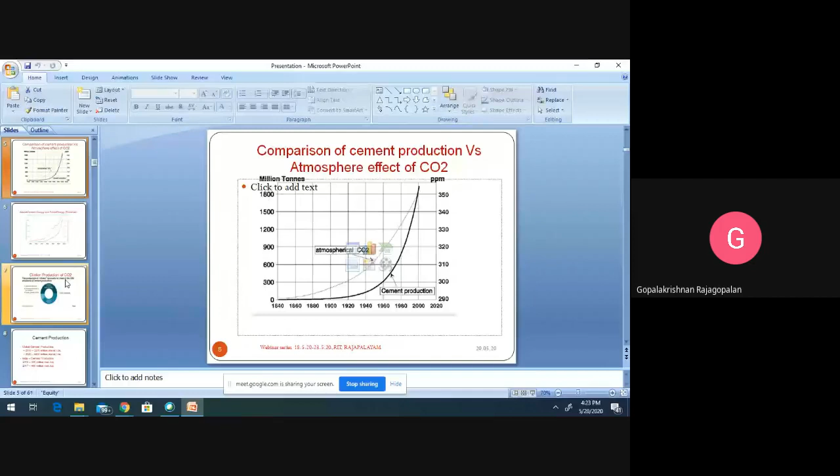So the global cement production, we have come across a summary of 2010.

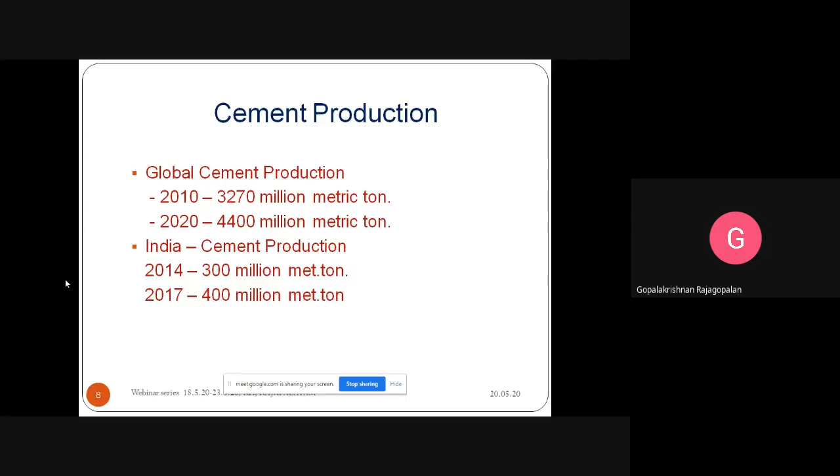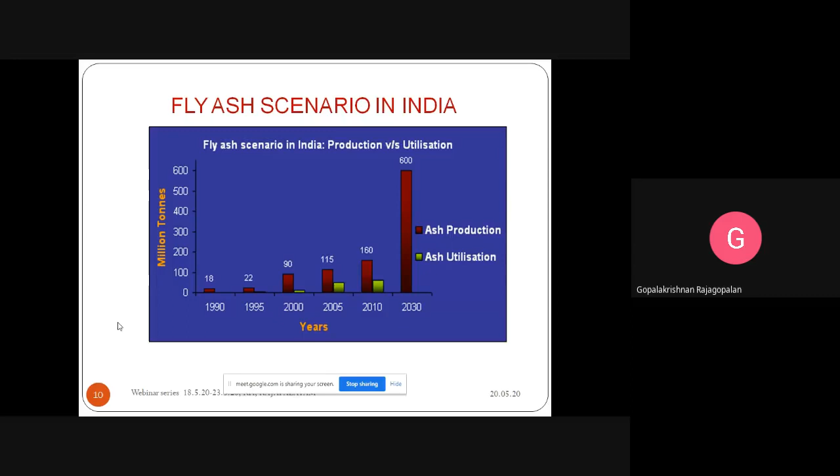So the fly ash scenario, we have already seen. Then coming to the utilization of fly ash, we have already seen.

Geopolymers were discussed in the 1950s, as we already discussed. It's the combination of an alkali activator and an aluminosilicate material. The alkali activator is sodium hydroxide and sodium silicate. The aluminosilicate material includes fly ash, GGBS, metakaolin, and other materials having zeolite structure containing alumina and silica. This is called the aluminosilicate material.

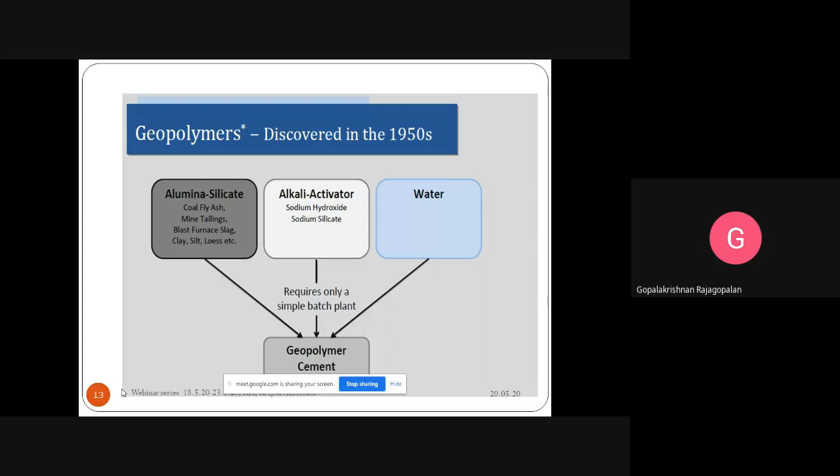The alkali activator will be sodium hydroxide, sodium silicate, or potassium hydroxide, or potassium silicate. Mostly sodium hydroxide and sodium silicate will be better compared with the other hydroxides. So finally we can form the geopolymer cement. This is the main chain, the polymeric chain.

Kaolinite, this is what we call the polycondensation of kaolinite, which is a silica-alumina material. This is the main chemistry behind the geopolymer.

For example, silica and alumina combine with sodium hydroxide to give Na-SiO-AlO. This we call silicon oxoaluminate, also called hydrosodalite or polysialate. We will understand more in the next slide, but this is the basic equation for the geopolymer combination.

So what happens in the chemistry behind cement? Calcium silicate hydrate is formed from the cement, and calcium hydroxide is liberated, as we will see. But in the case of geopolymer, water is released and there is no effect from the water.

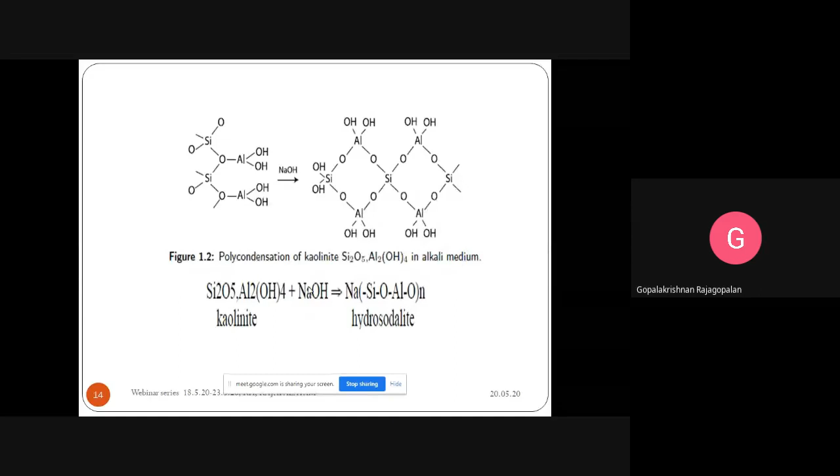So when cement needs early strength, we go for C3S, which is 45 to 60%. Early strength means we go for C3S. Later strength means we can go for C2S. This is the main reaction.

What happens is calcium silicate combined with water gives calcium silicate hydrate plus calcium hydroxide. This calcium silicate hydrate gives the main strength to the cement. This is the chemistry behind cement.

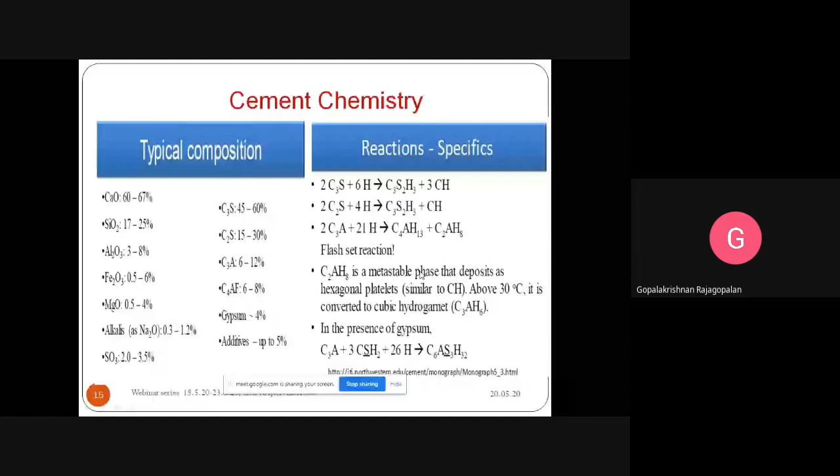Geopolymer concrete is made using aluminosilicate materials such as fly ash, GGBS, metakaolin, and an alkaline activator solution. The setting mechanism mainly depends upon polymerization. Curing temperatures are between 60 to 90 degrees Celsius, or ambient curing. Unlike conventional concrete, geopolymer concrete doesn't have water curing. It can be cured in the ambient, that is the open place, or it can be heat cured in chambers. We'll discuss that one by one later.

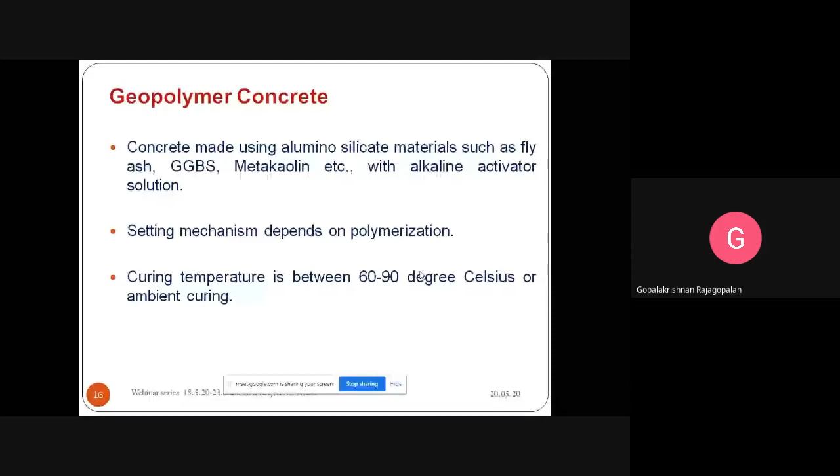The main constituents are aluminosilicate materials having GGBS and fly ash, an alkaline activator which is a combination of sodium hydroxide and/or potassium hydroxide and sodium silicate. GGBS and fly ash contain silica, alumina and calcium oxide.

Coming into the category of fly ash, we have different types available in India. IS 3812 fly ash states there are two categories, grade 1 and grade 2. According to US ASTM C618, we have class F fly ash and class C fly ash. Class F fly ash has less than 10% calcium oxide, while class C has more than 10%. We can use class F fly ash for producing geopolymer concrete; it gives more strength compared with class C fly ash, which has more calcium oxide. Similarly, metakaolin also contains silica, alumina and calcium oxide.

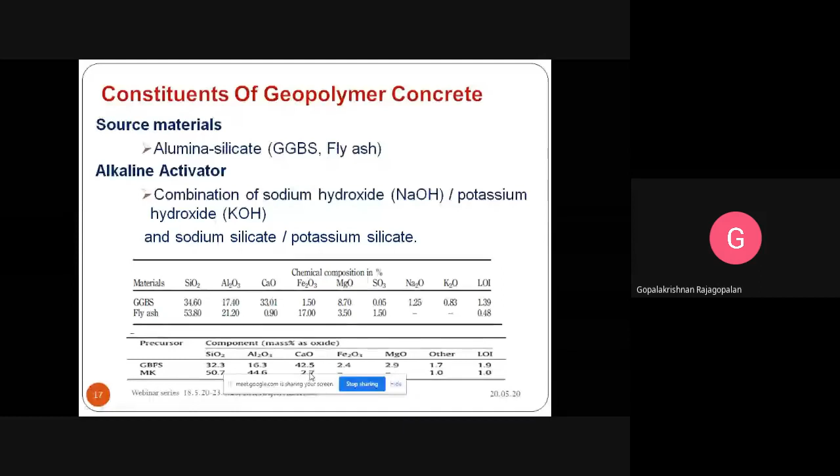So these are the main geopolymer structures. This is the amorphous, semi-crystalline, three-dimensional silica aluminate material. This is called geopolymer.

The first one, zeolite, I already explained. This is called silicon oxoaluminate having one chain. Then we call it poly(sialate-siloxo) having a double chain. We have another one, poly(sialate-disiloxo), having another chain. Depending upon usage, this structure will be used. Suppose we have a silica to alumina ratio of 1, the specific purpose is different. If the ratio is 2, the purpose is different. If it's 3, the purpose is again different.

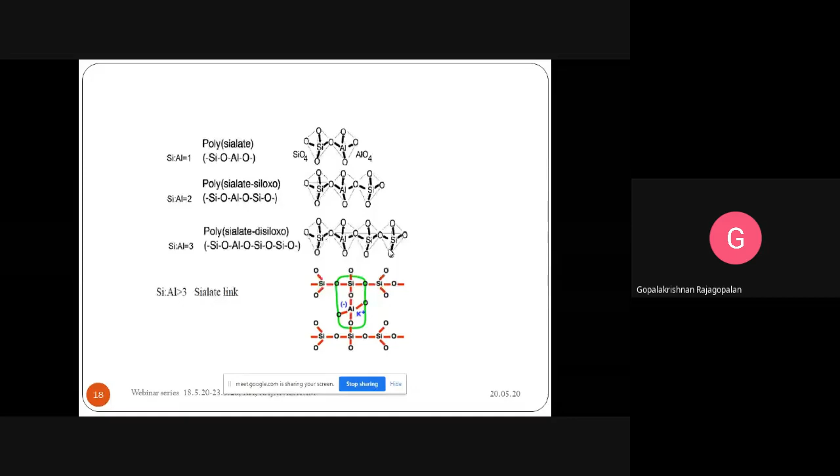What occasions can we use these? What are the things where we can use this particular structure? You'll see that on the slides below. This is the bondage or covalent bond having silica-alumina ratio 1, ratio 2, ratio 3, and ratio more than 3.

This is the model created for geopolymerization. First, aluminosilicate material is available. Due to dissolution with water, it forms aluminate and silicate. Then speciation happens, then gelation, then reorganization, and finally we have polymerization and hardening. This structure model was created in the year 2007 by Duxson.

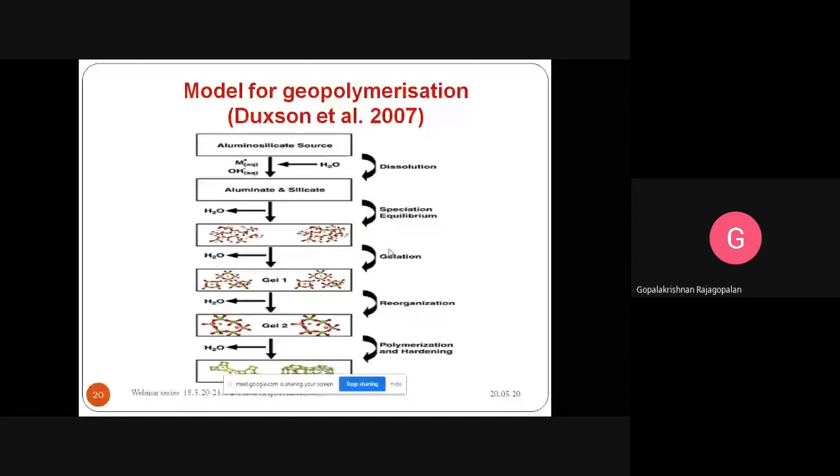This is the fly ash geopolymer concrete. Going into more detail: fly ash is produced from thermal power stations where coal is generated. Alkali solution plus this fly ash causes dissolution to happen, so a silica and alumina species structure is formed. Then nucleation happens with the ratio of aluminosilicate oligomers, then oligomerization happens, forming the poly(sialate) framework we discussed. Then final polymerization happens, giving the geopolymer phase, followed by curing. The final product is fly ash based geopolymer cement concrete.

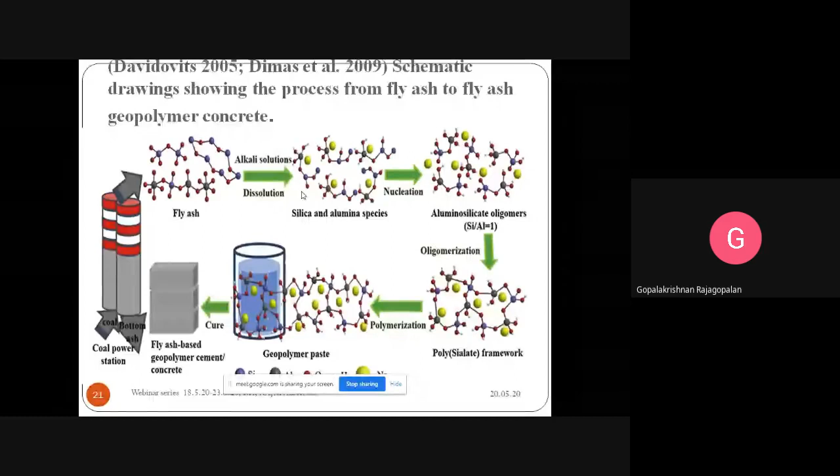So this is the chemistry and structure of the reaction happening in fly ash based geopolymer concrete - the molecular structure happening in the geopolymer structure.

Another researcher describes what happens if we use metakaolin instead. Metakaolin contains silicate and alumina, which gets polymerized, forming oligomers, then nucleus, then aluminosilicate material, the zeolite phase, then aluminosilicate, and finally we get the geopolymer. This mechanism was formed by the researcher Provis.

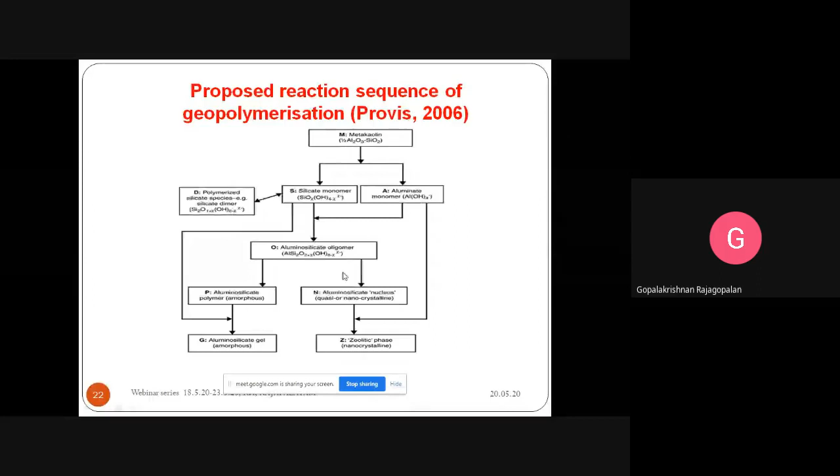Suppose we are using GGBS in geopolymer concrete - what is the structure in GGBS based geopolymer concrete? This is the glassy material dissolution mechanism of aluminosilicate glass during the early stage of reaction. GGBS contains glassy materials, so the exchange of H+ ions happens first. Second, there is breakdown and hydrolysis of the Al-O-Si bond, then breakdown of the depolymerized glass network, then finally release of silica and alumina.

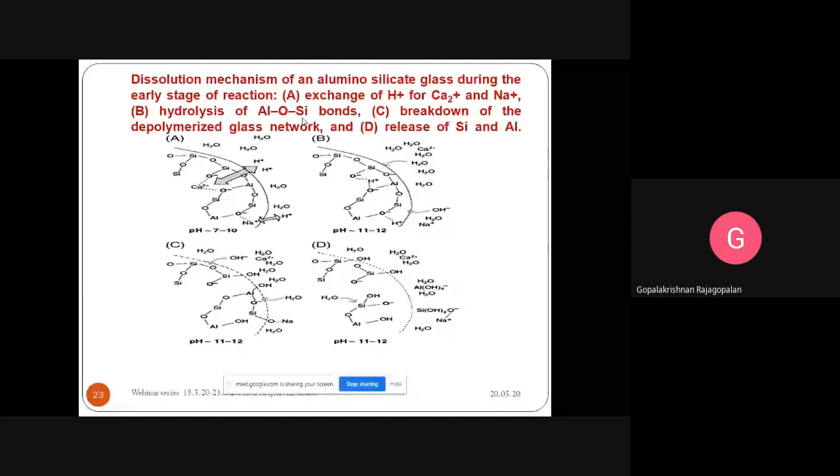So the main advantages of geopolymer concrete: reducing carbon dioxide emissions, low price, better compressive strength, fireproof, low permeability, environmentally friendly, and excellent performance in both acid and salt environments. It is very suitable for precast element concrete products like railway sleepers, electric power poles, and marine structures.

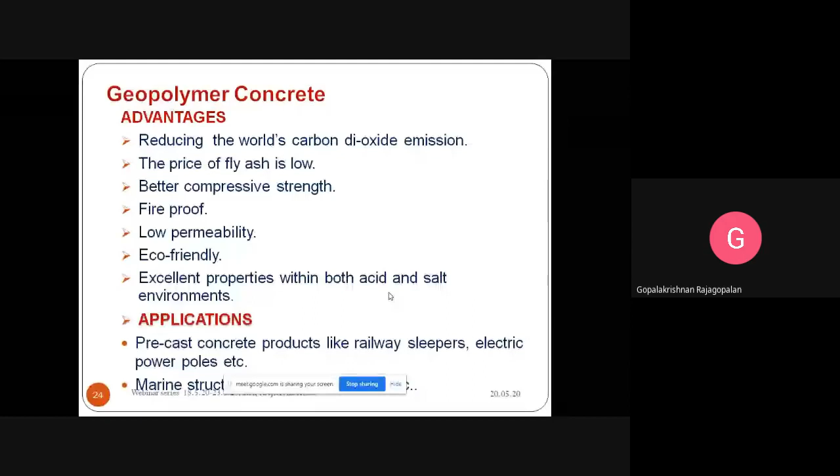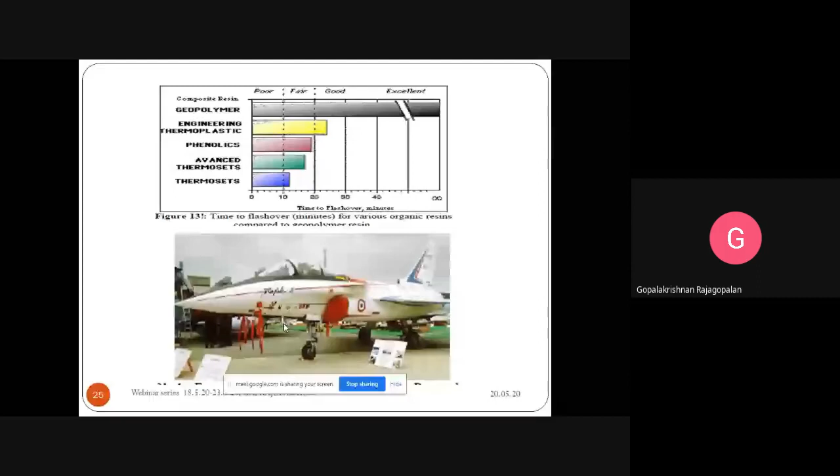This is the first aircraft produced in 1986 using geopolymer synthesis material. French Air Force created this. Then they produced a geopolymer cement, called polysialate siloxo cement, having good compressive strength.

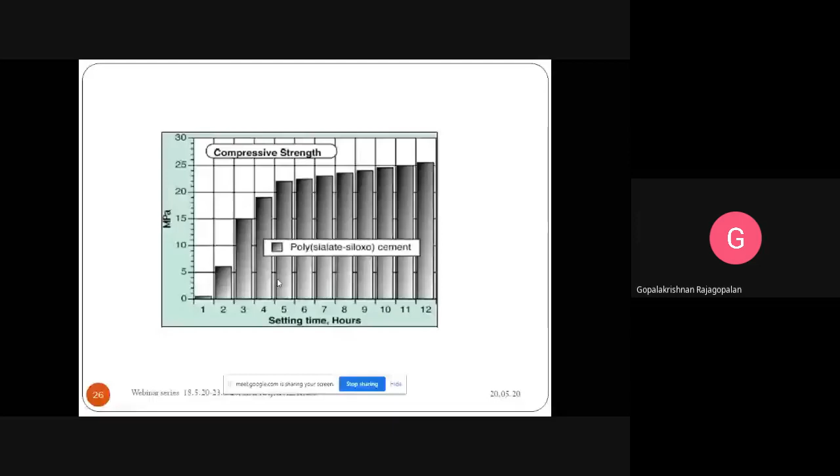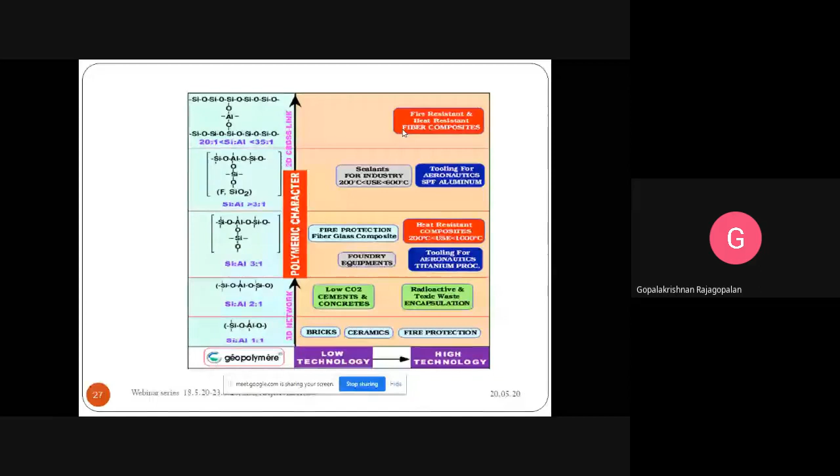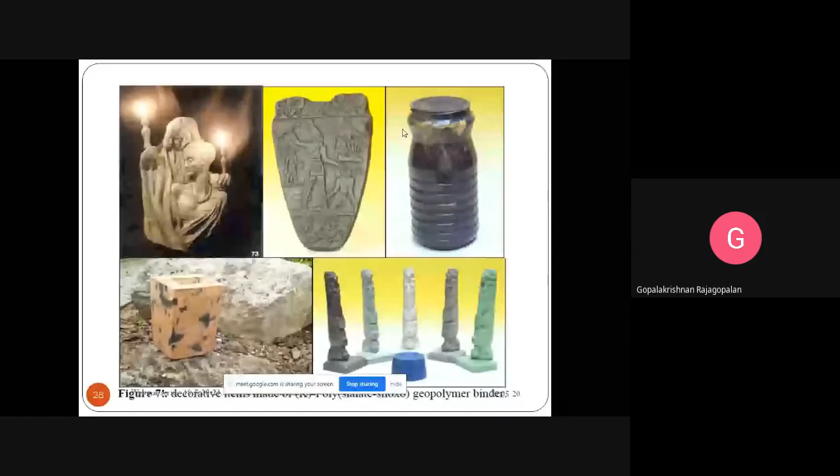So this is the model. First, they created ornamental purpose, different small architectural elements. This is the mold, toys and all they created for strengthening, showing how it works. This is the foam geopolymer resin concrete prepared, and these are the blocks of the foam concrete geopolymer.

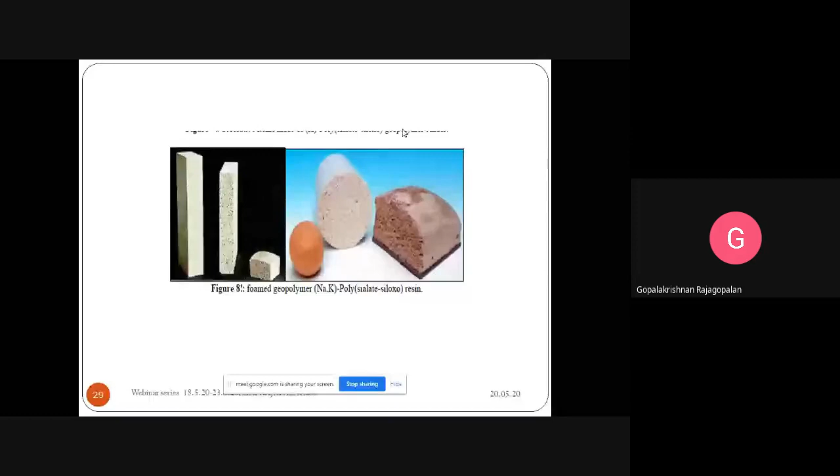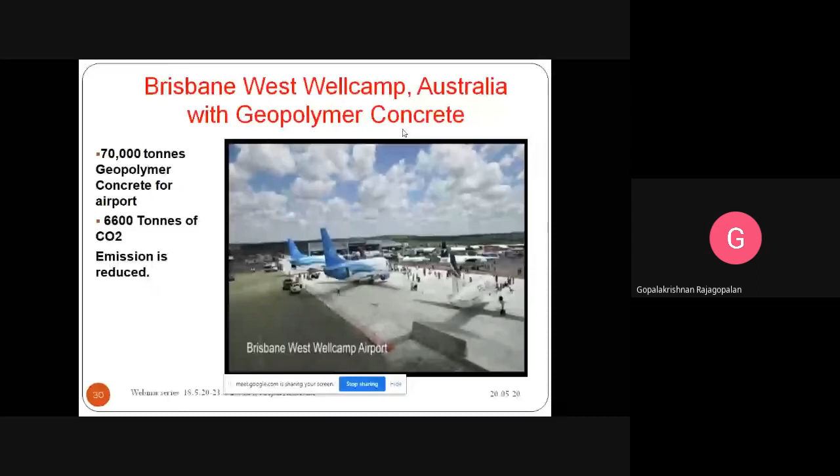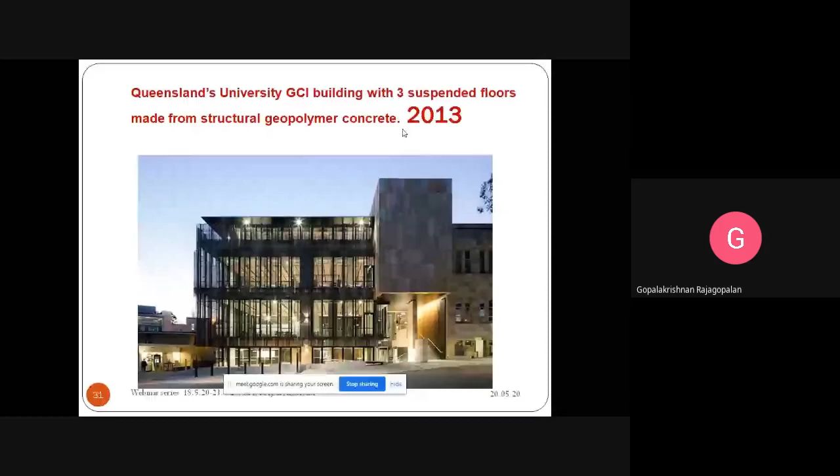Then second comes the 2013 Queensland's University GCI building with 3 suspended floors made from structural geopolymer concrete. In 2013, this beautiful building was formed in Australia at Queensland's University. It consists of prefabricated panels. 33 precast slag-based geopolymer concrete floor parts have been utilized for casting and preparing the complete building.

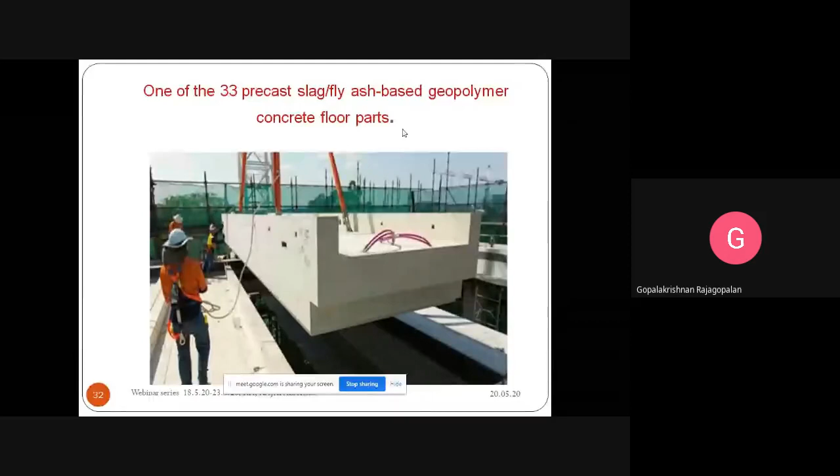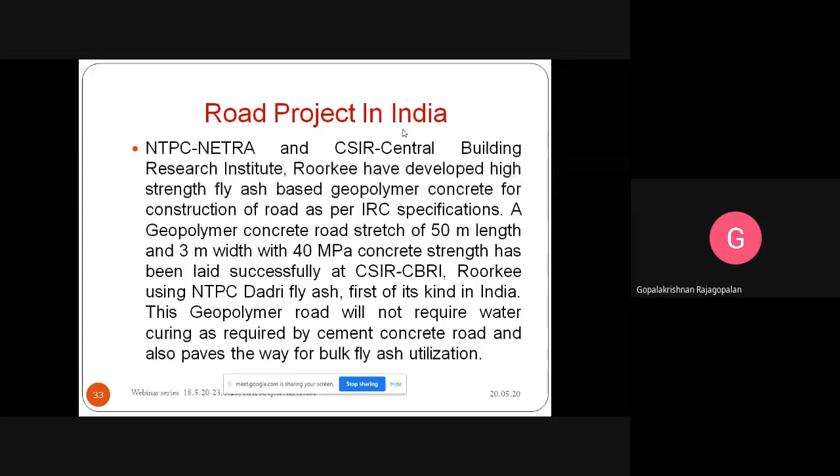So it is a road project in India. National Thermal Power Corporation, NETRA, and CSIR-Central Building Research Institute Roorkee have developed high-strength fly ash-based geopolymer concrete for construction of road as per Indian Roads Congress specification. A geopolymer concrete road of 50-meter length and 3-meter width, of 40 megapascal concrete strength, has been laid successfully at the CSIR-Central Building Research Institute collaboration project, using Dadri fly ash produced by the National Thermal Power Corporation in India. This is the first trial in India.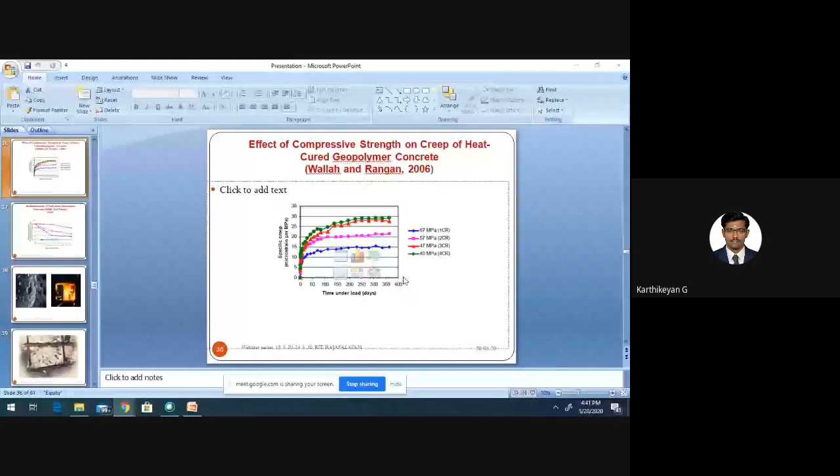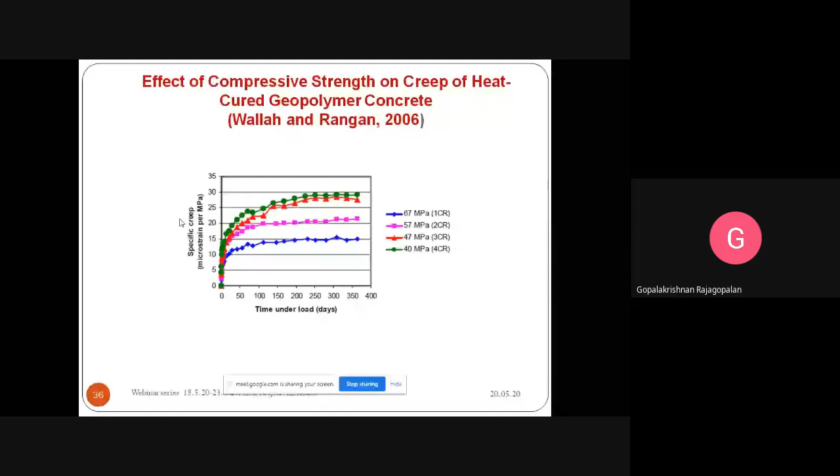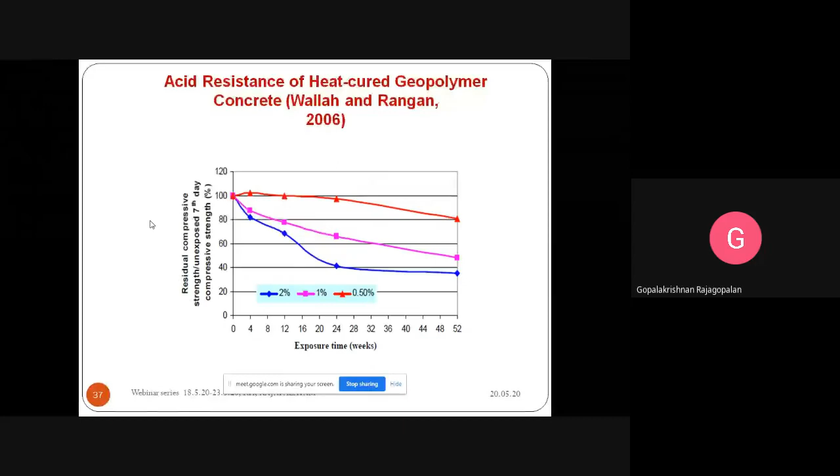This is the creep of heat cured geopolymer concrete. Coming to the acid resistance of heat cured geopolymer concrete: depending upon the percentage of acid resistance, that is 1% sulfuric acid, as the sample has been increased, the strength has been reduced. Residual sulfuric acid has been reducing the strength. So this is the acid resistance, higher resistance and corrosion resistance.

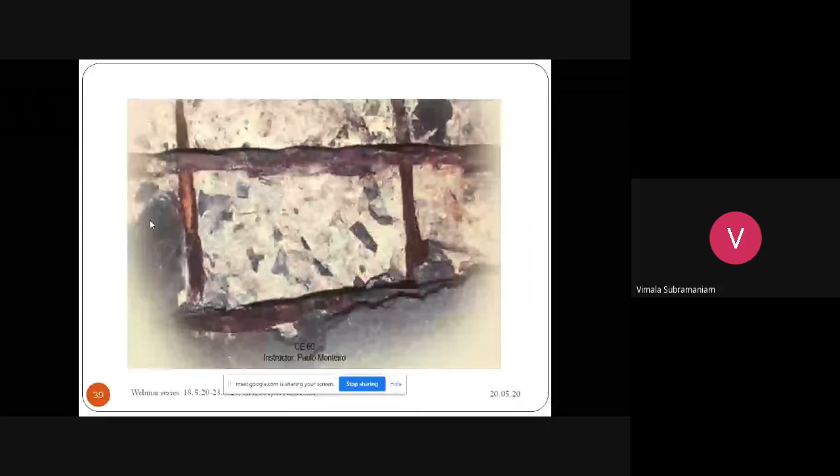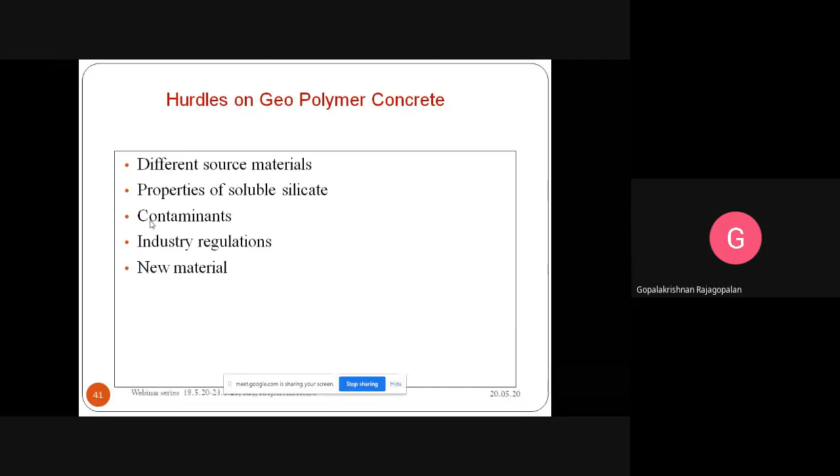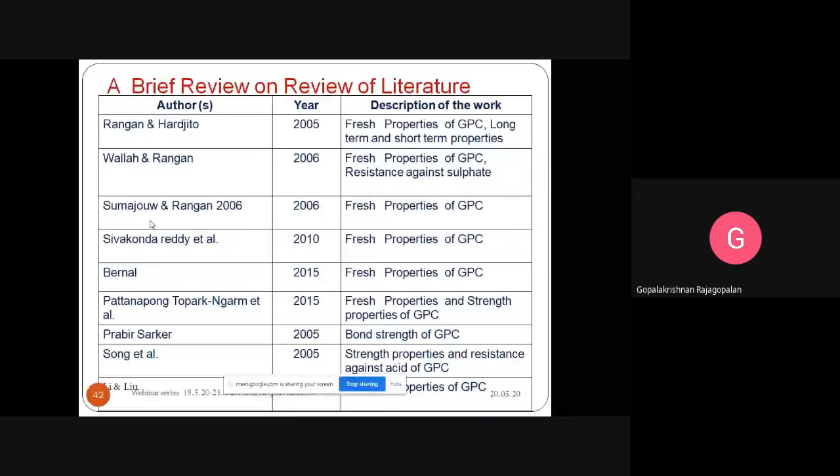Now I'll make a quick summary. Many researchers have studied a lot in the area of geopolymer concrete. I have given a brief summary here. Since time is lacking, I will quickly go through this just to show you different people working in this area.

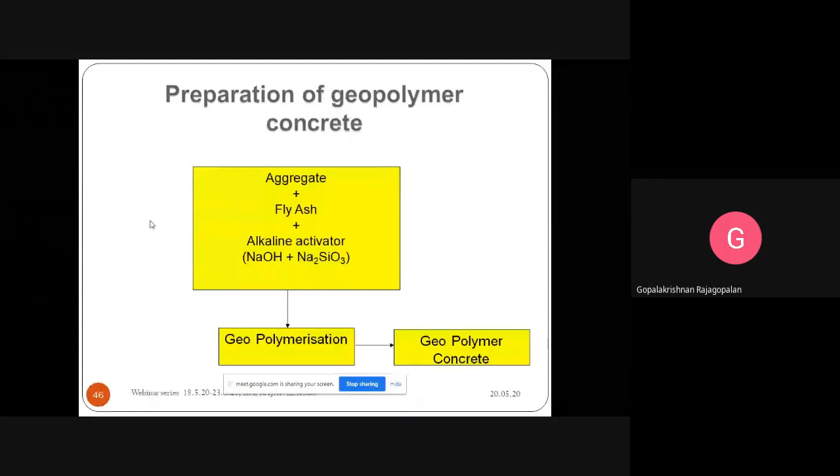So what are the mix design assumptions for preparing geopolymer concrete? What is the density of conventional concrete? It is 2500 kg or 2400 kg per meter cube. Similarly, the density of geopolymer concrete is assumed as 2400 kg per meter cube, same as OPC concrete. The combined coarse aggregate and fine aggregate should be 75% of the entire mass, that is 75% of 2400.

Next comes the fine aggregate - what percentage? Fine aggregate is assumed to be 30% of the total aggregate. The ratio of alkaline liquid to fly ash is assumed as 0.35. The alkaline liquid is a combination of sodium hydroxide and sodium silicate to fly ash, assumed as 0.35. Then the ratio of sodium silicate to sodium hydroxide is taken as 2.5. Then dosage of superplasticizer, if needed we can take it, otherwise we can leave it. These are the assumptions.

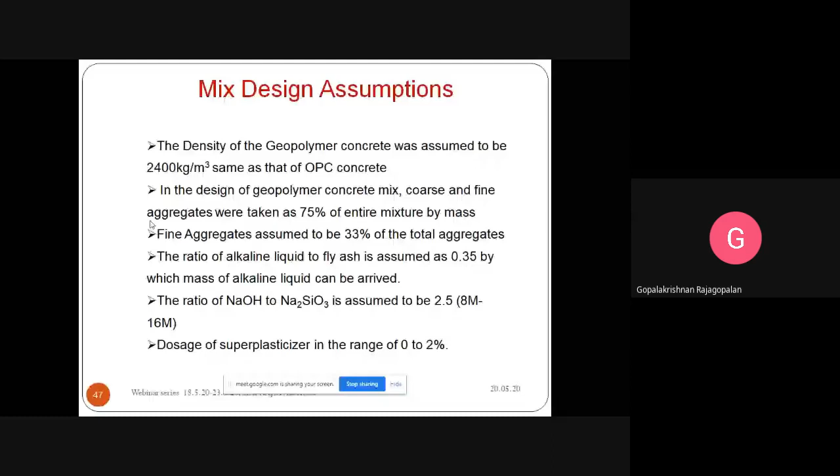First of all we go to find out - from the experimental study, higher concentration of sodium hydroxide results in higher compressive strength. Higher the ratio of sodium silicate solution to sodium hydroxide solution by mass gives higher compressive strength. These are very important points.

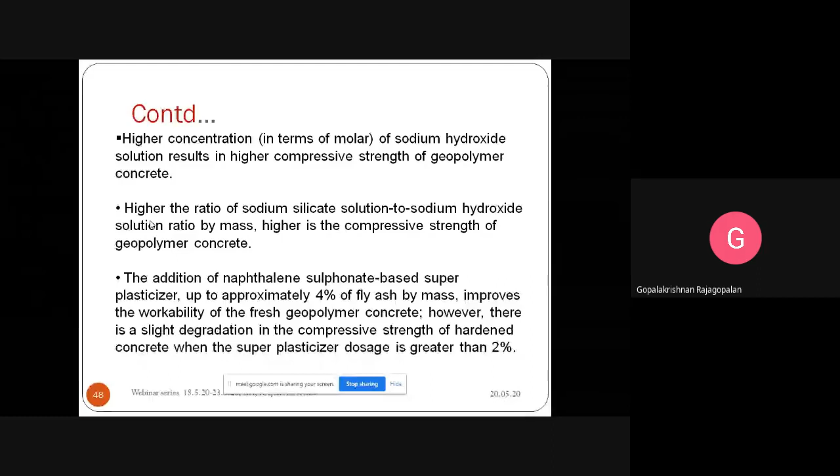Till now we have been hearing about what is meant by geopolymer concrete, what is the chemistry, everything. Now comes the mix design, very useful for your research work - for faculty doing research and students interested in doing UG projects. If you want, we can use naphthalene-based sulfonate superplasticizer up to 4%, or simply keep it as required.

So these are the data we have to keep in mind while mix designing the geopolymer concrete - what type of sodium hydroxide we have to use, and what type of sodium silicate we have to use.

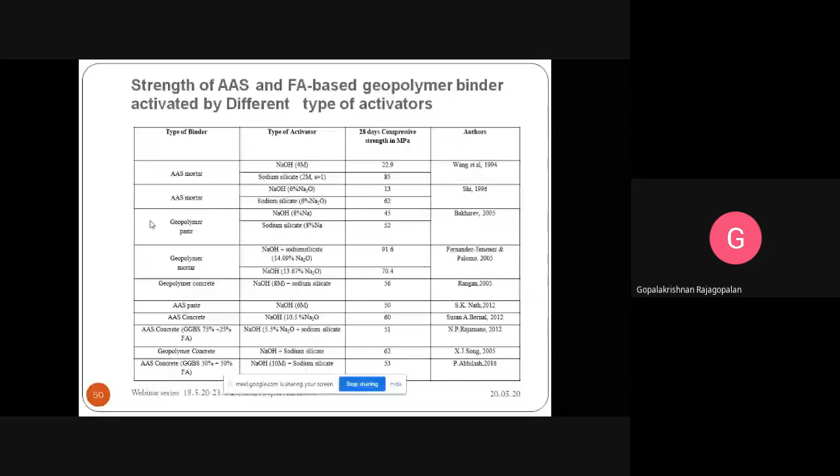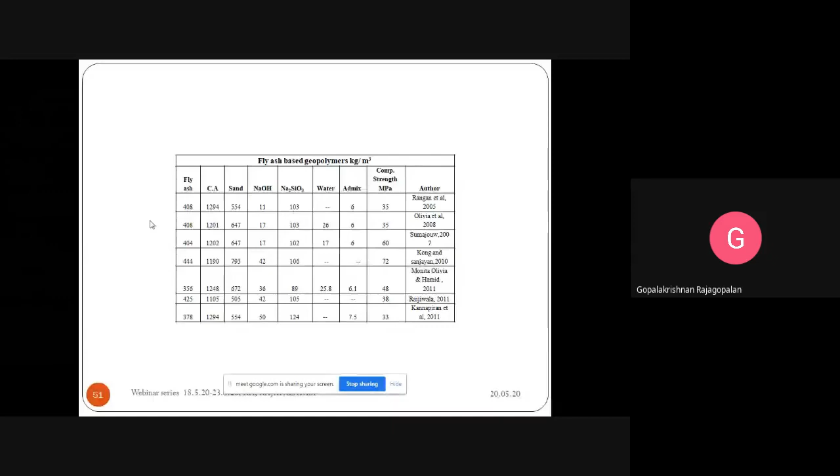Various authors, what mix design they have taken and find out the strength also. So this gives the reference mix. We should not take the same mix what they given, but we can take it as the reference mix. Suppose you are using the fly ash based geopolymer, or suppose you are using GGBS based geopolymers, you have to go for the same procedure what I was mentioning.

Coarse aggregate, sand, then sodium hydroxide, then sodium silicate. So these are the different authors. You can keep all this for reference purpose.

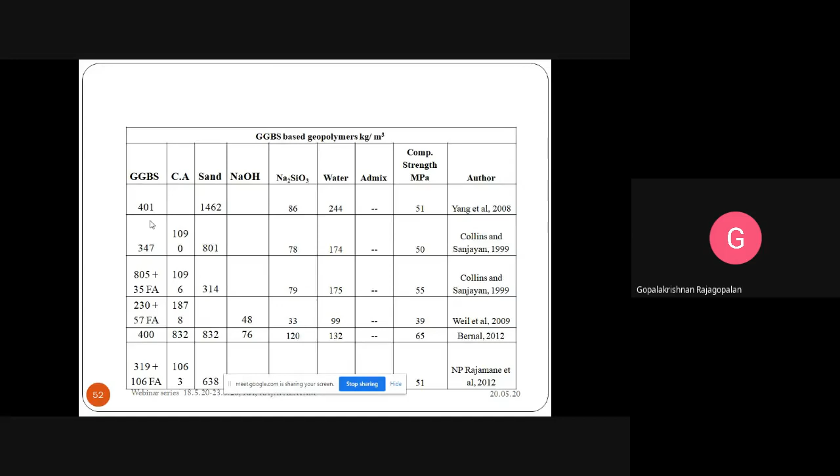So what is meant by water to geopolymer? Water means the material water contained in the sodium silicate, and how much amount of sodium hydroxide we are going to take for that water to prepare 12 molarity or 8 molarity or anything. Then geopolymer solid means fly ash, GGBS, whatever material we are using. So that ratio we take as 0.24 - I have taken 0.24 as an example. You can take 0.22 or 0.3, whatever may be.

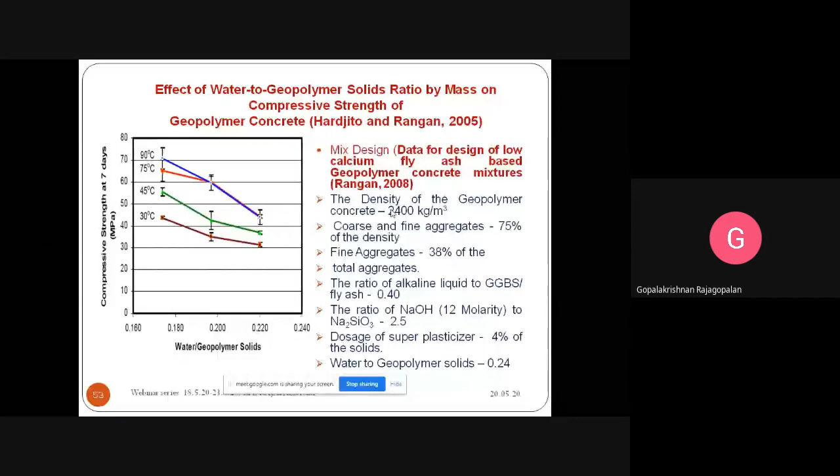So this graph will be very useful to determine the mix design for the geopolymer concrete. Once the mix design has been identified, then that's all. Then effect of curing time - suppose you are going for the curing time, what effects does it indicate?

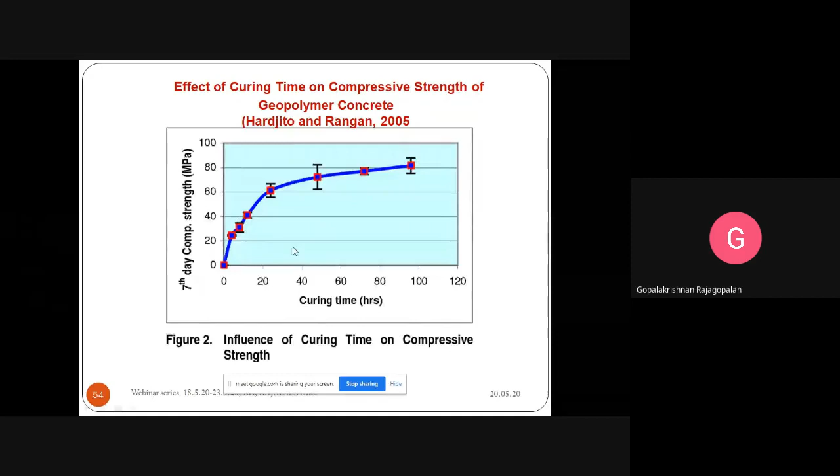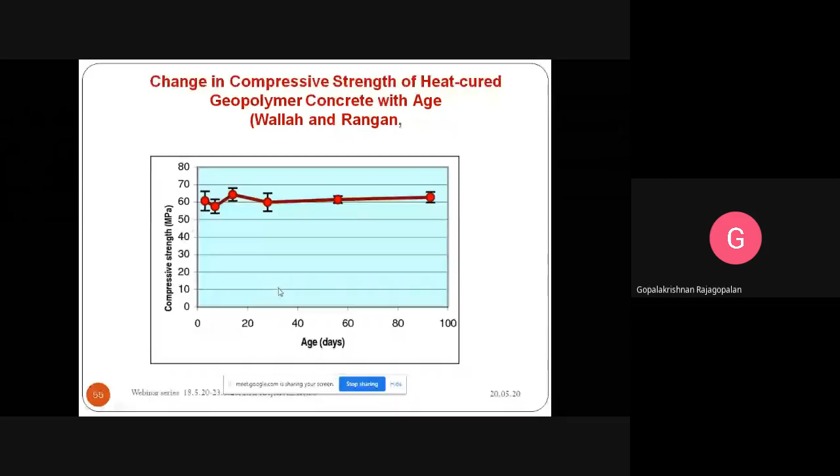Similarly, change in compressive strength of heat-cured geopolymer concrete with age, at different ages - for example 28 days, 60 days, 80 days, 100 days. Depending upon the compressive strength we need, we can fix the age also.

So what you have to do - once the mix design is prepared, one day before, we take the sodium hydroxide pellets, mix it in water, and keep the sodium silicate separately. The next day, combine both the sodium hydroxide and sodium silicate, then dry mix the fine aggregate and coarse aggregate separately, and pour the solution. If you need water, we can mix it in.

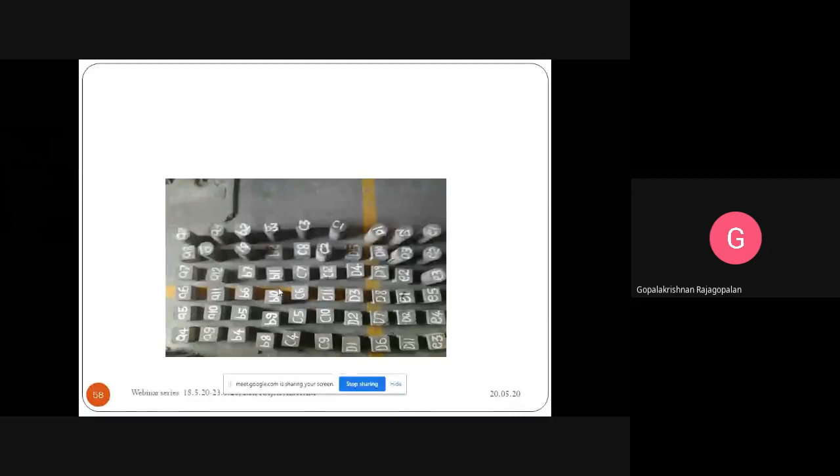Suppose we are using GGBS, we can go for ambient curing. Suppose we are using fly ash, we can go for heat curing of the samples. This is the complete preparation of the geopolymer concrete. Just I want to show one video regarding the preparation of the geopolymer concrete.

Karthikeyan sir, yes sir, hello. Yes sir, hello sir, can you hear me? Yes sir. Yeah, I am putting one video now. Okay, I am putting one video now. Yes sir.

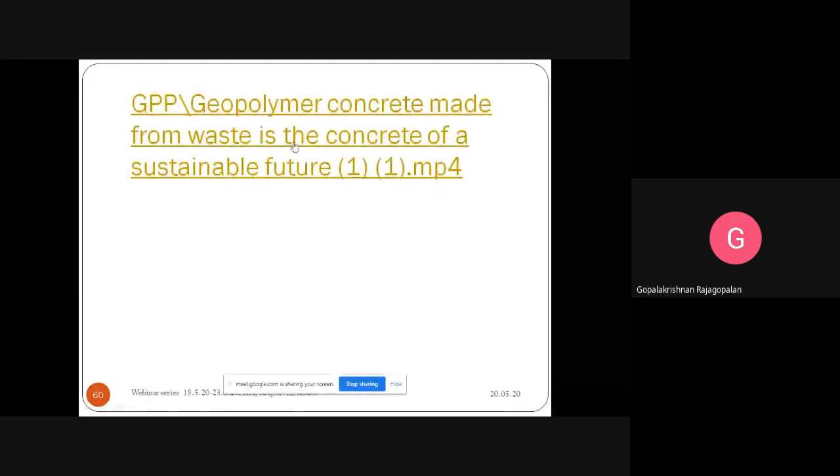Hello sir, Gopalakrishnan sir. The video's voice is running very slowly sir, you can send the link sir. Audio is not clear sir. Karthikeyan sir, yes hello sir, audio is not clear. Okay, only 2 minutes only for this video. Okay sir, proceed, otherwise we can close it, no problem. Okay, any queries we can take. You can share the link also sir in the chat if possible.

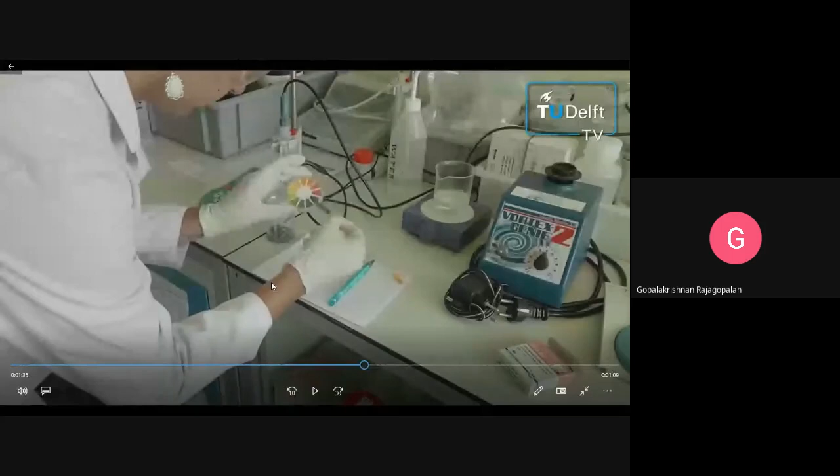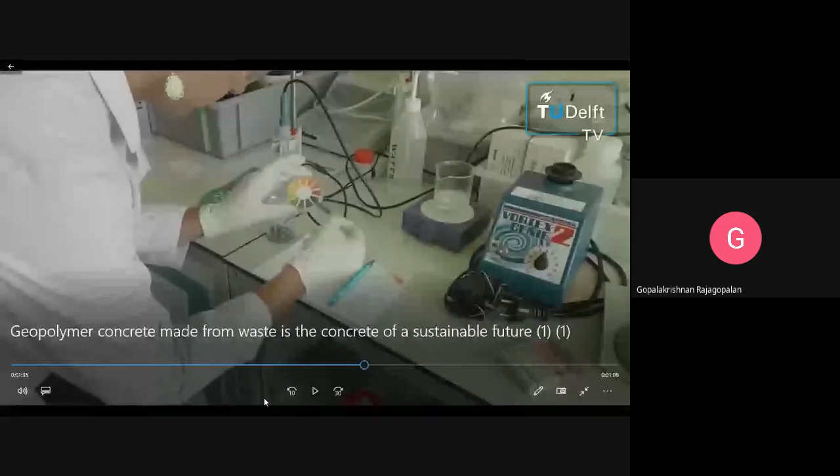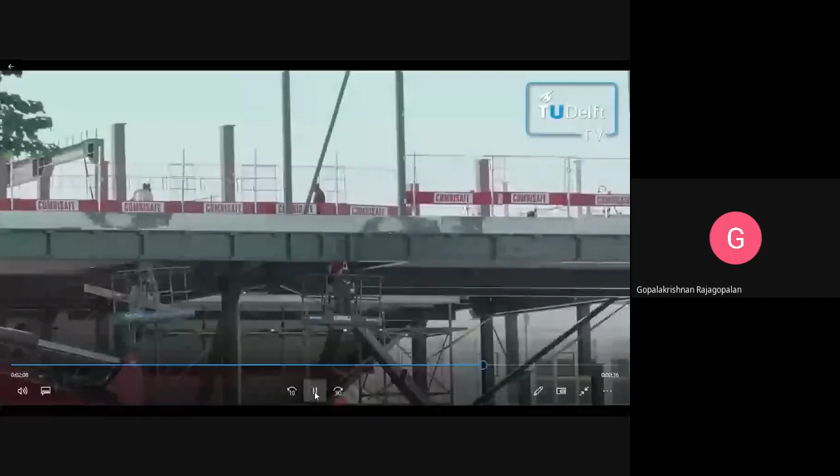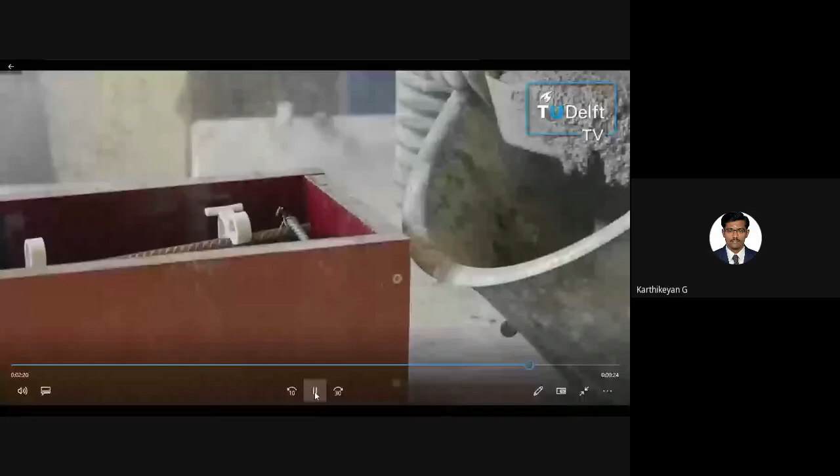We are also trying to demonstrate how this material works in practice. So we started with non-structural applications, then 3D printing and structural applications. The first was the geopolymer canoe last year. This year, a reinforced cantilever bench. In the near future, we will cast a geopolymer bridge. If we can put geopolymers into practice in the Netherlands, the complete production of concrete can be done without importing resources. In addition, we would need less landfill space because we can make use of waste and industrial byproducts. By using geopolymer concrete, we are not only reducing global CO2 emissions, it also makes us rethink the role of waste. Geopolymer concrete might just be the building material of the future.

Yes sir, hello, you can proceed. Audience, yes sir, you can proceed. Hello sir, yeah, there is another video. Just I will quickly run that video for 2 to 3 minutes only, because I want to share our Professor Joseph Davidovits, sharing 40 years celebration of the Geopolymer Institute in that video. Okay, I will quickly run it for 2-3 minutes.

Welcome to the 11th Geopolymer Camp. A well-established tradition that I present what I call the state of geopolymer research and development. I do each year a selection of interesting scientific papers, patents, or events which happened.

In 1972, and it was a shock for us. So I set my target in 1972 to create mineral polymers to solve this problem. We created a private research company here in St. Quentin with our textile industry partners, which was located not far from here, 300 meters, in this building that was an ancient and closed textile laboratory. Years later...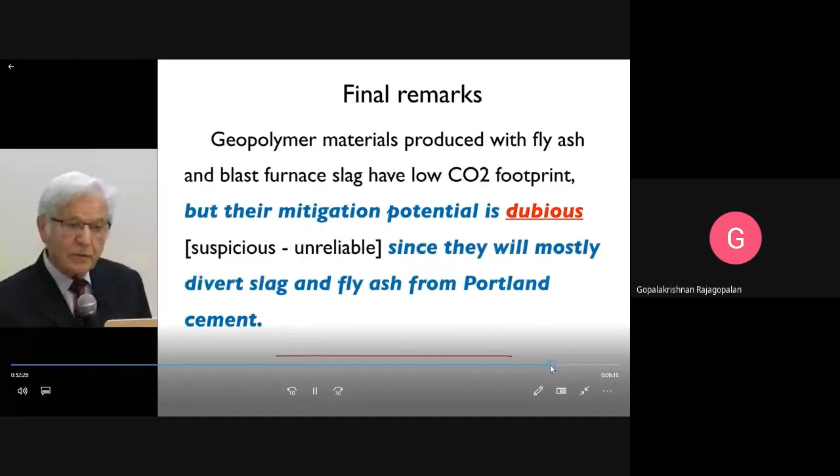Does efflorescence affect the strength characteristics of geopolymer concrete? The efflorescence rate compared with conventional concrete is very low in geopolymer concrete. That study I have not taken myself, but from previous researchers' studies, the efflorescence reaction compared with conventional concrete is very low.

Any other question? Is there any specific codal provision for geopolymer concrete mix design, or do we have to go through assumption? Actually, in India, they have not formed any guidelines for geopolymer concrete. There is no IS code. Till now we are using what previous researchers have done, taking reference from that only. But I came to know the Government of India is preparing guidelines for mix design of geopolymer concrete. Various people working in this area are forming a committee and they are going to form the geopolymer guidelines mix for IS code provisions.

How to improve the workability of fly ash and slag based geopolymer concrete? Depending upon requirement, we can use super plasticizer and a minor amount of water. There is no bad effect of water in that, but too much water will not give exact correction. So trial and error only, we have to use water and super plasticizer to get the workability.